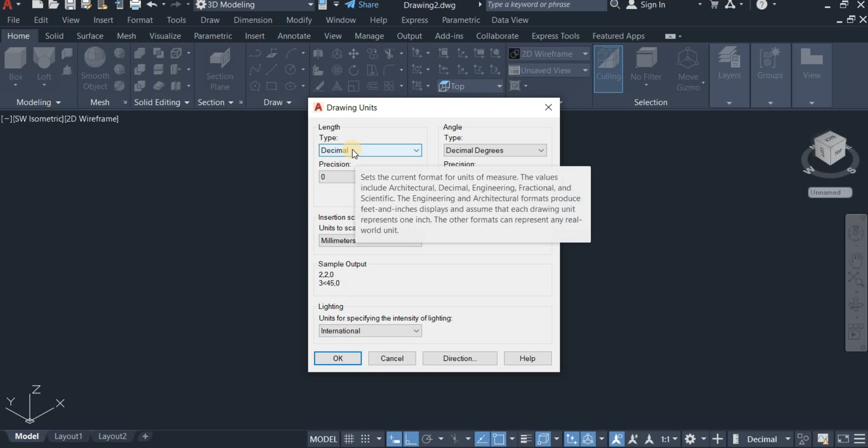Here is a new page. As usual, I will have to set up my drawing units, and that I'll do by just typing U, choose units and do my setup right here. I choose decimal as a type, then precision I'm going to choose 0, insertion scale is millimeters, and I click OK for that setup.

Again I'm going to choose my workspace, and I'm going to use 3D modeling workspace for this, and also I'm going to set the view to top view to start the drawing.

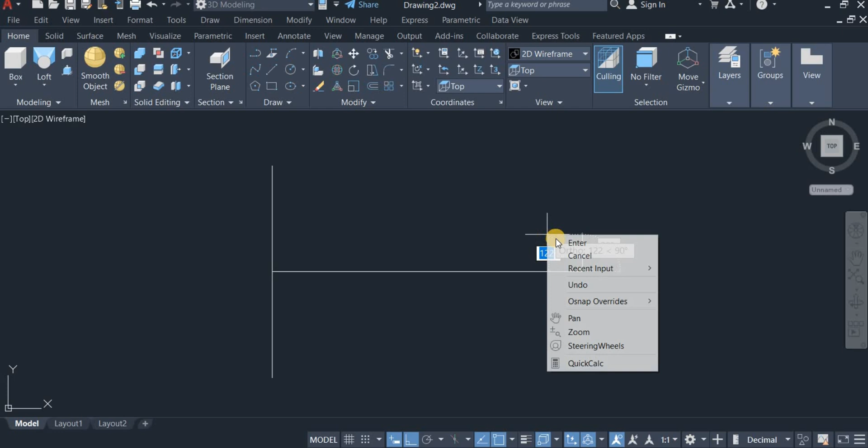First I'm going to use the line command, so I click on line and draw a vertical line of 700 units. Draw another line, a horizontal line of 1000 units. Then draw another vertical line of 500 units.

I'll move this vertical line from the midpoint here and drop it right here. Then use the line command again to connect these two vertical lines. Repeat line and connect these two.

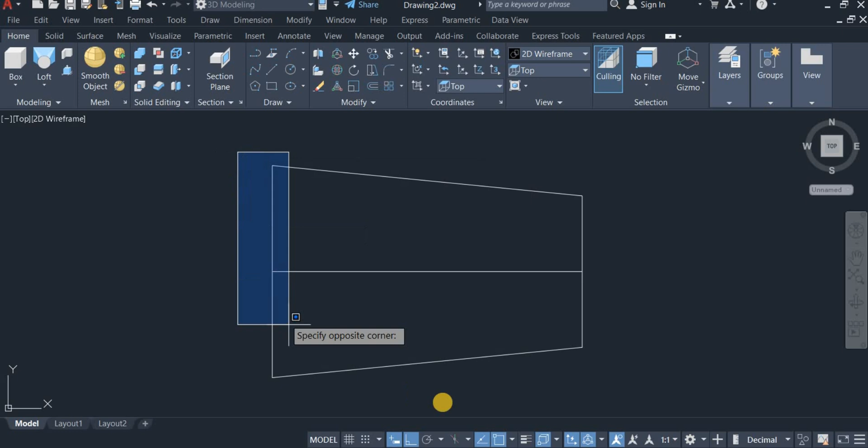Now with the join command, I'm going to join all these lines together. I click on modify and choose join and highlight all this. So I now have one polyline.

Now with the offset command, I'm going to offset this. I click on offset, right click and choose through. Click on this and pull this together. Close. It should be okay. Exit the command.

Now draw a vertical line. Cut it off from somewhere here. Then use the trim command to trim off these ones.

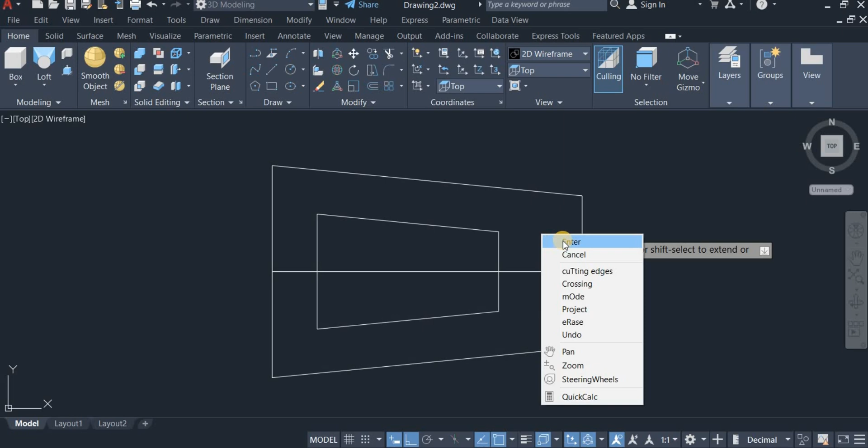Then shift this one towards the right. Move this closer here. It should be alright. Okay, so I'm now going to use the fillet command to fillet all these corners.

I click on fillet and choose the fillet radius of 100 units and fillet these corners. Repeat fillet. This time right click and choose multiple because there are more to fillet.

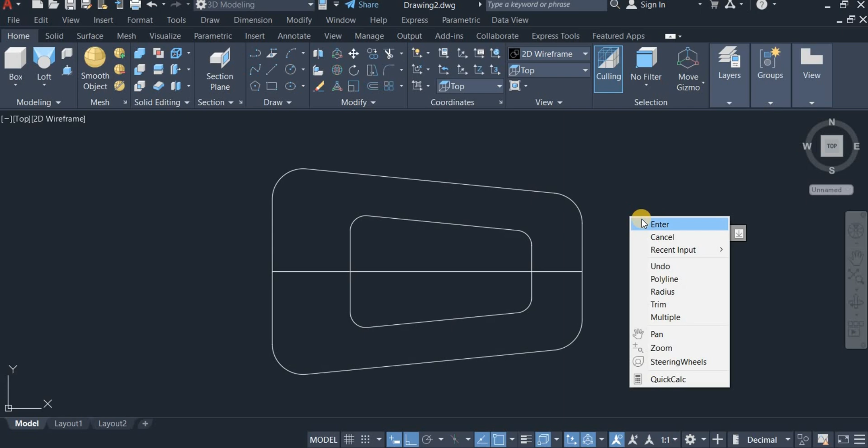Next I'm going to draw a line from these two centers, then move the line from this point to here, somewhere here.

Now draw a circle of diameter 135 from the red point. Click on circle command, here at the center, draw a circle of diameter 135.

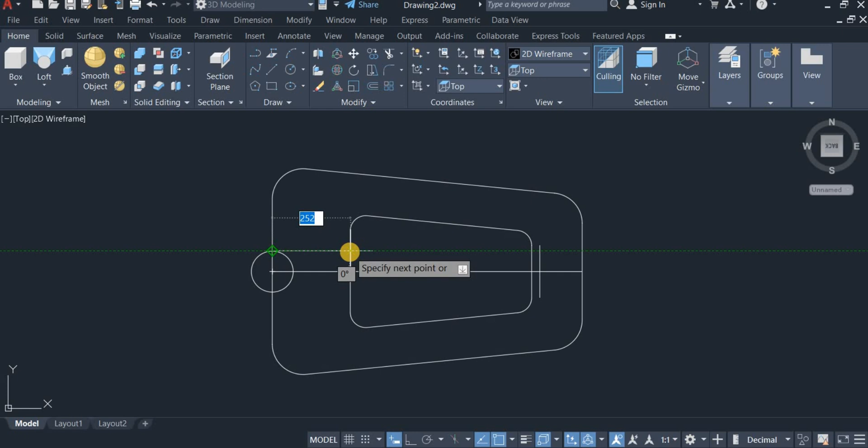Now draw a horizontal line from the red point, connect this, repeat same here. Repeat line, and from this point again to this red point, repeat line.

So next I'm going to switch to isometric view. I click on this and choose southwest isometric.

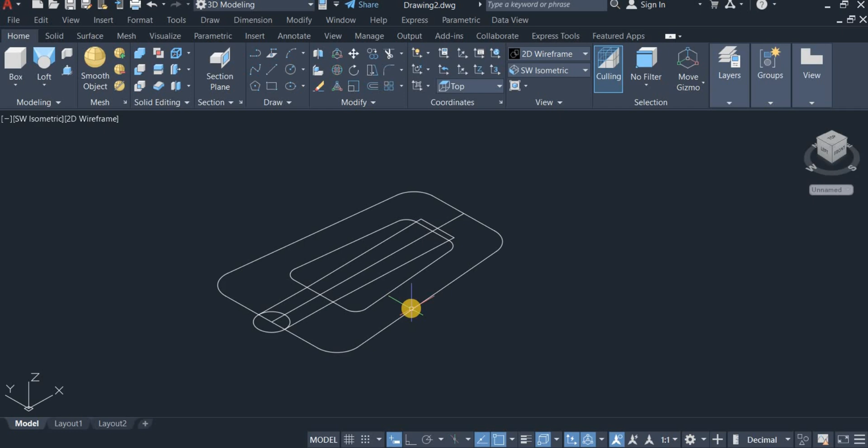I'm now going to move this very one upwards by 300 units. I click on move and move this by 300 upwards, 300.

Now with the loft command, I'm going to loft this and this. I choose loft and loft this too and enter. Enter again.

Now I'm going to switch to shade of gray to see how this looks like.

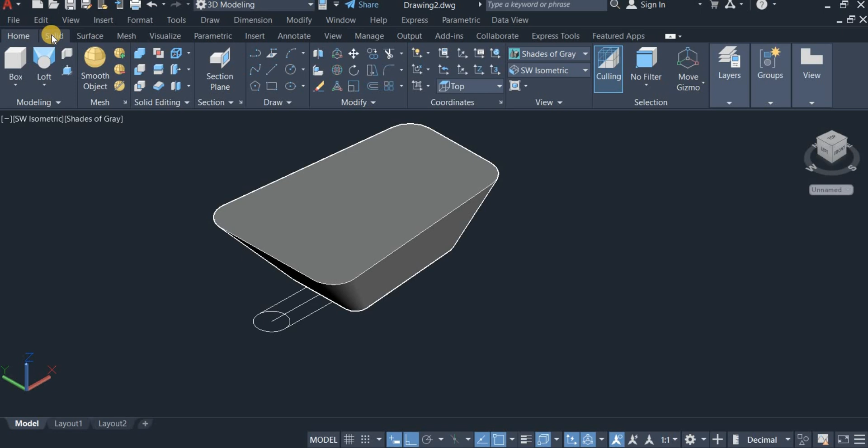Next I'm going to use the shell command to shell this very object now to a thickness of 3. I move to the solid toolbar and click on shell, click on this object, click on the top on the shell, enter, and enter a thickness of 3. That's done.

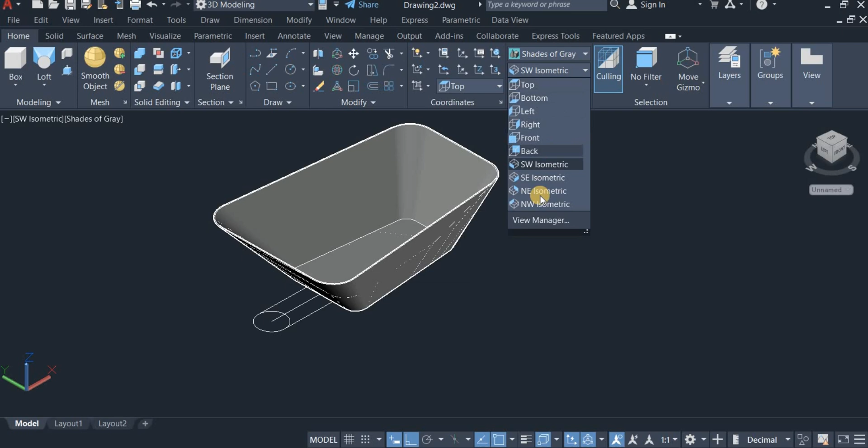So I'm now going to switch to front view again. I'm going to switch to front view.

Now I'm going to draw a rectangle, put here as the starting point. Draw a rectangle of this size. I'm going to rotate this rectangle to an angle of -8 degrees.

I click on this rectangle, right click and choose rotate. With here as the point of rotation, uncheck the ortho mode and enter -8. Now switch back again to isometric view.

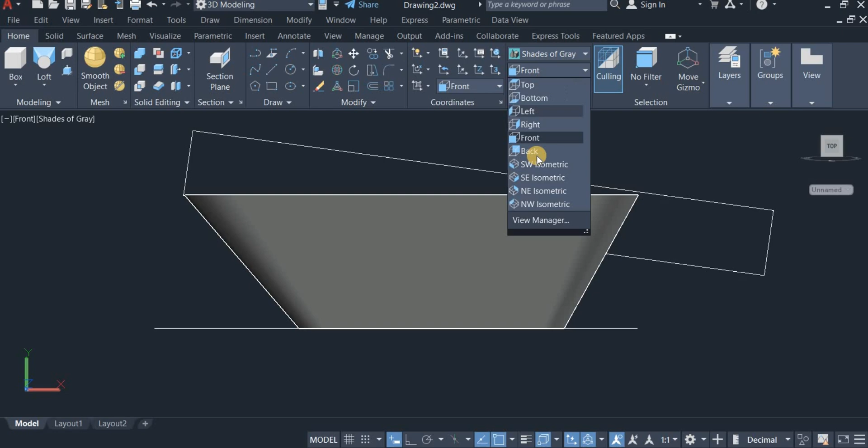Now I'm going to use the press pull command to press pull this. Switch to wireframe. Now use the solid subtract command. I'm going to subtract this from this. So I click on this first, then subtract this.

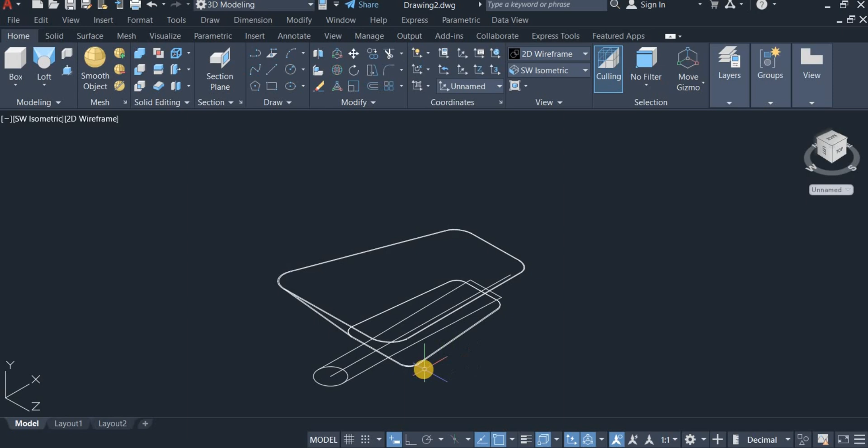So I now have to delete this. So here is the object now. So I'm now going to switch to top view.

Switch again back to wireframe. Remove this line or reduce it to 0 point. Switch to front view.

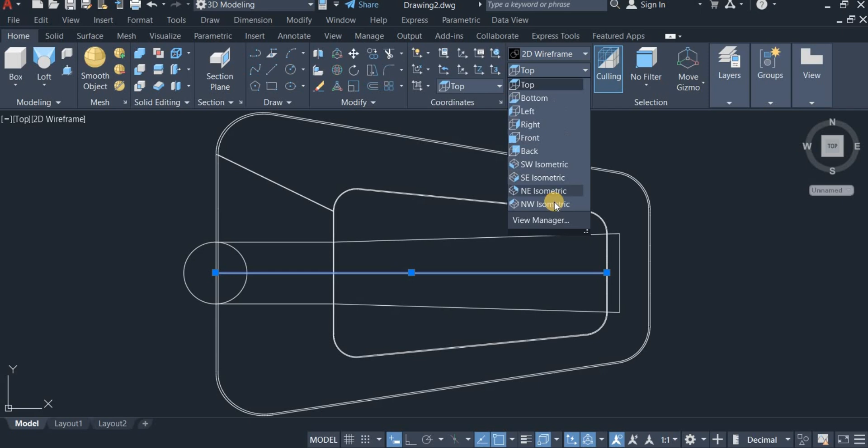Now draw a line from 0 point and connect these two. Draw another line from 0 point. Draw a line. Check the ortho mode. Draw a line of 600 units. Exit the command.

Now switch the view to isometric. I'm now going to hide this for some time. Click on this and isolate it.

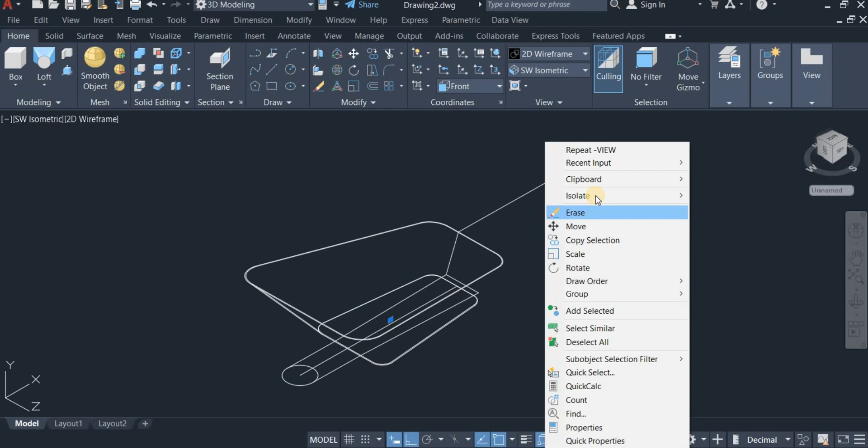I'm now going to join these two lines using the join command, and copy this line from the 0 point and place it right here.

I'm now going to switch to top view. Switch the UCS to top. This time I'm going to rotate this to an angle of 25 degrees.

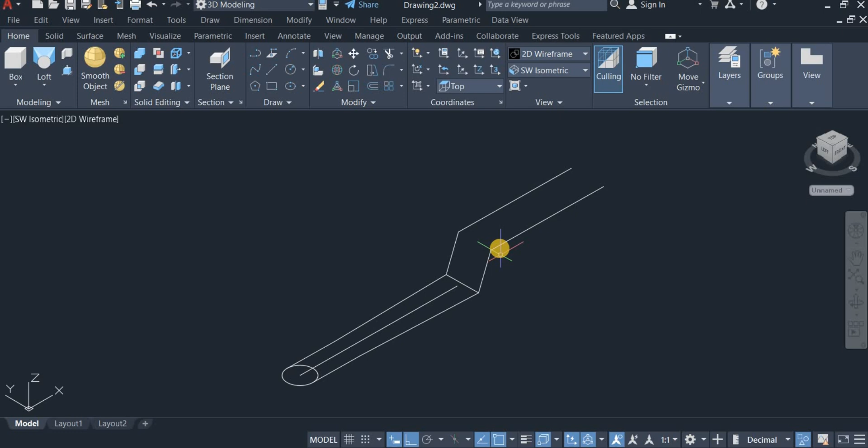Before I do that, I have to also fillet this. So I'm going to use the fillet command to fillet these edges, these two. Right click and choose a radius of 100 units, and fillet this and this. Repeat fillet, fillet this and this.

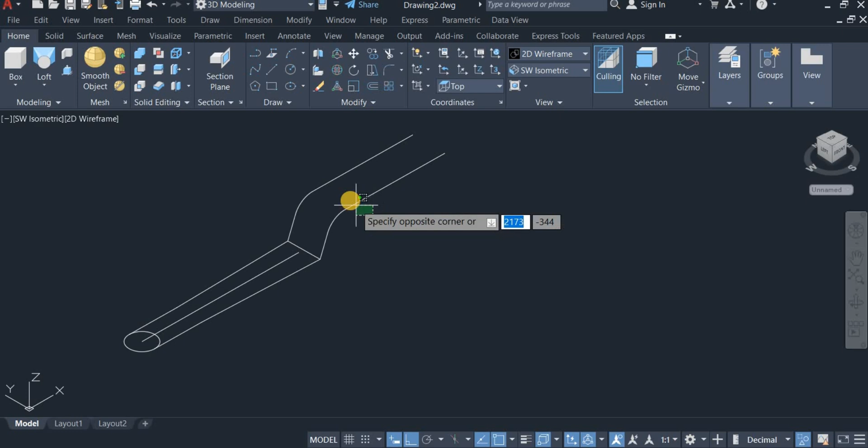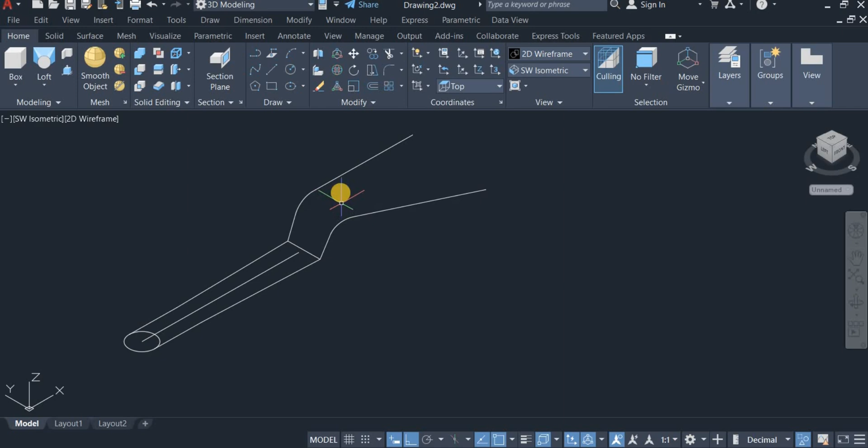Now I'm going to rotate this to an angle of 25 degrees. So I highlight this, right click and choose rotate. But here as a point of rotation, I'm going to rotate at an angle of minus 25 degrees. Click on this and also rotate to an angle of 25 degrees.

Now with the trim command, I'm going to trim off this, and this, and this.

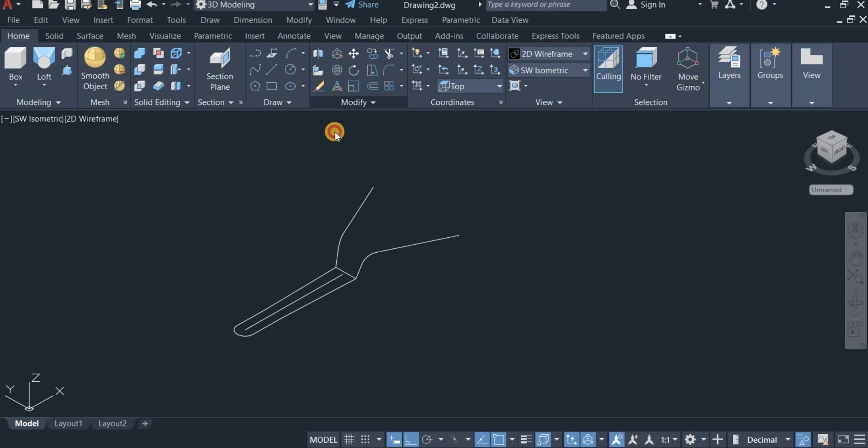Now use the join command. Join this, this, this. So I now have one geometry there.

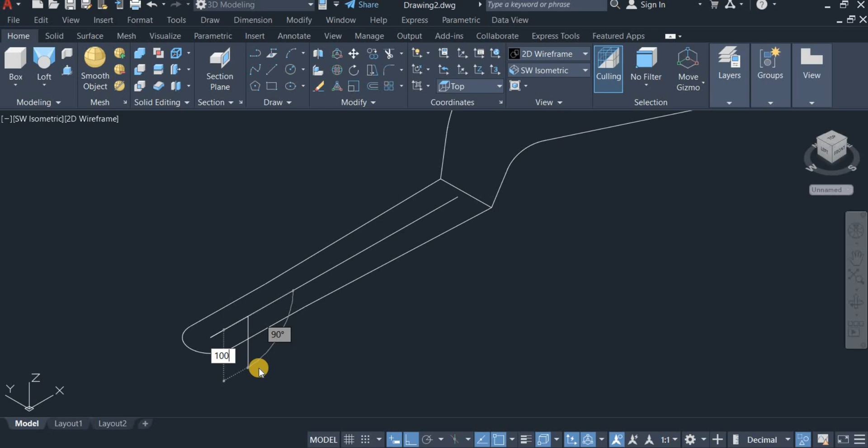Next I'm going to draw a line from this point. Draw a line of 125, which is the radius of the tire. Then draw vertically downwards by 100. Exit the command.

So I now have to draw a circle of diameter 25 units. Now I'm going to sweep this very circle on this very part. So I come right here, click and choose sweep. Highlight this very circle, enter, and click on this very part.

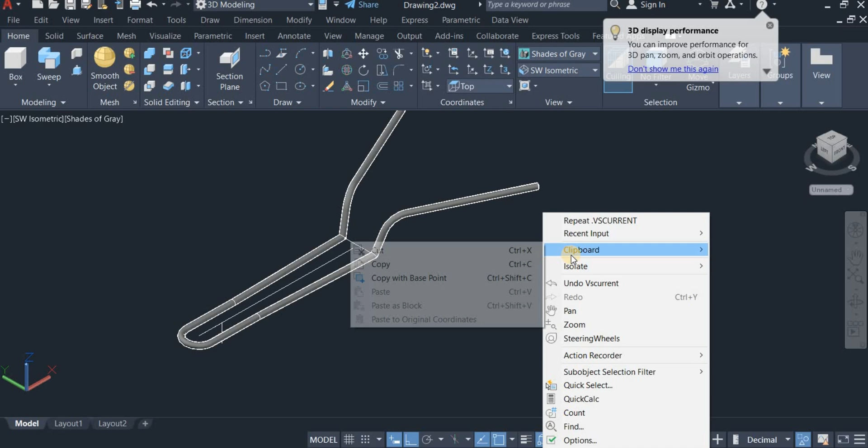Okay, so that is done. Let's view in shade of gray. Let's also end the isolation to see how this fits in.

Next I'm going to start to create the handles of this very wheelbarrow. So I'm going to turn it around. I'm going to draw a line of 3mm from the center. Draw a line of 3.

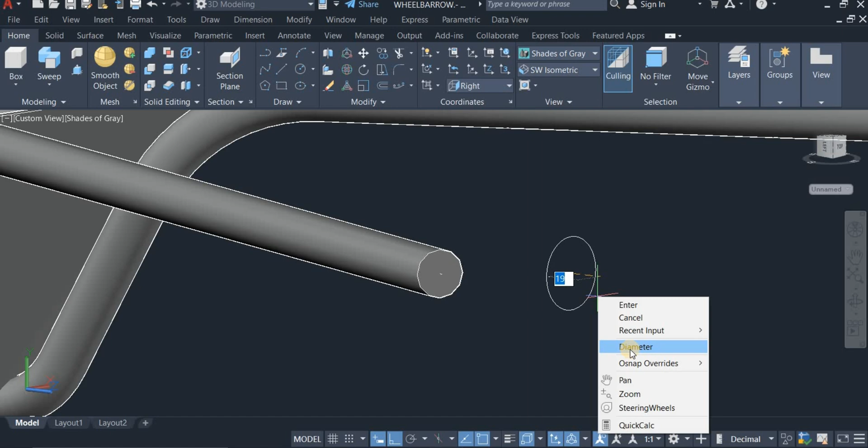Now draw a circle of 40 diameter. Now I'm going to sweep this very circle along this path of the 3mm line. So I click on sweep, click on the circle, enter, and locate this very small line.

Now I'm going to draw yet another line of 100 from this center. Now draw another circle of 30 diameter. Now draw a small square of 2 by 2.

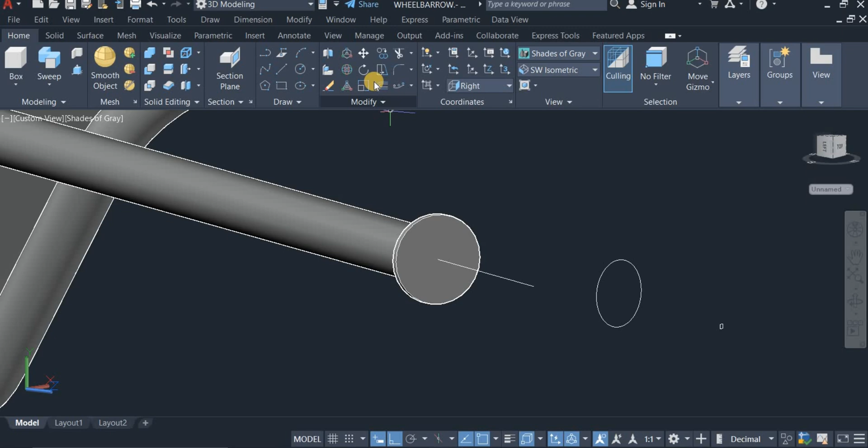So I'll move this square from the geometric center and drop it at the quadrant point of this very circle, which is here.

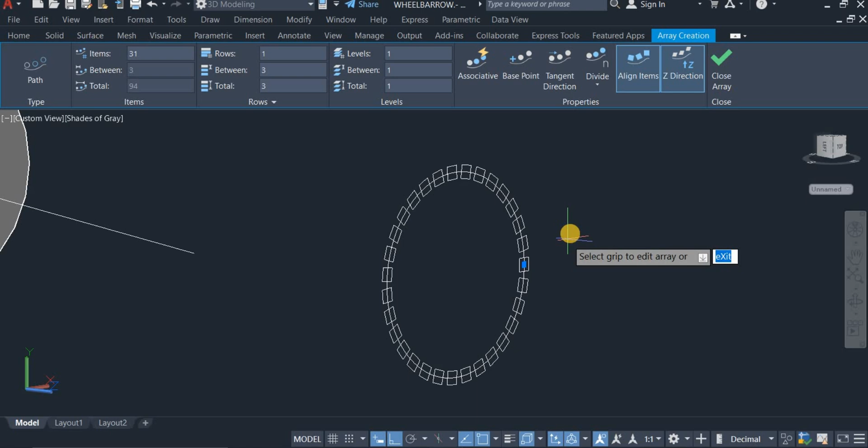Now I'm going to use a path array to array this very square along the path of this very circle. So I click on path array, array this very square, click here. Now click on base point. The base point of this square is here. Now choose the tangent direction, click on tangent direction. This is the tangent direction. Now click on measure and click on divide to close up this gap and exit this command.

Next I'm going to use the group command to group this. So highlight the whole of this, right click and choose group. Now I'm going to sweep this along this very path, the path of this very line. So I click on sweep, click on this, enter, and click on this very line. So that's the first handle.

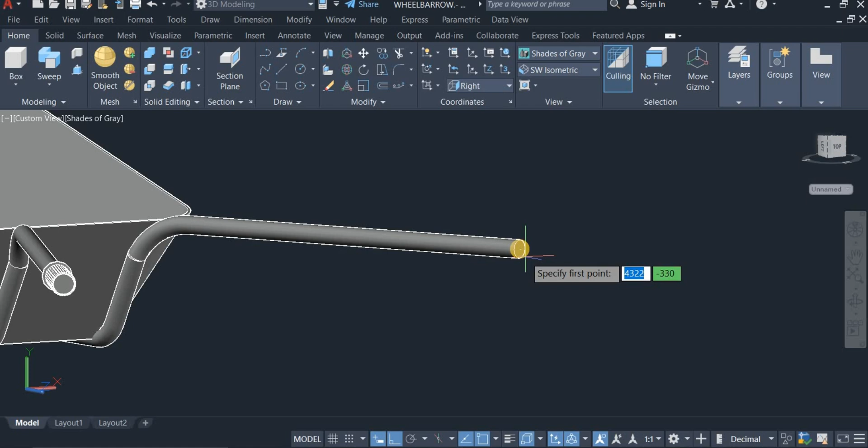I'm going to turn it around again and draw the second handle. I'm going to draw another line of 3mm from the center. Enter. Now draw another circle of 40 diameter.

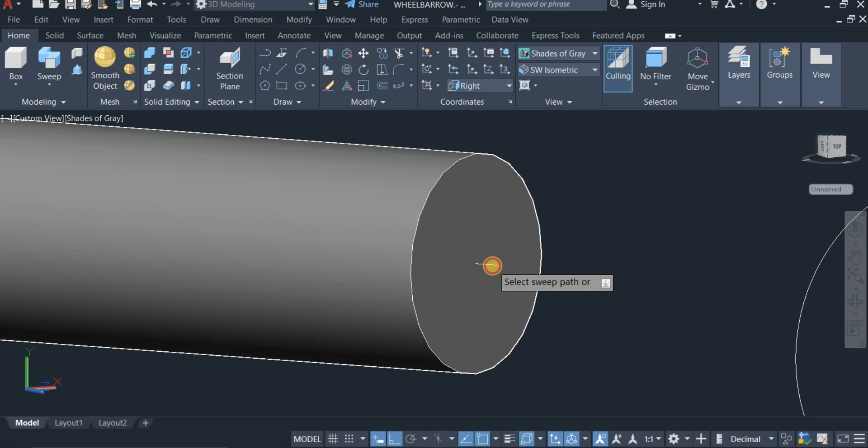So I'm going to sweep this very circle along this very path. I click on sweep, click on this circle, enter, and click on this 3mm line. Now click on line command again and locate the center, and draw another line of 100mm.

Now draw another circle again of 30 diameter. Click on circle and draw a circle of diameter 30. Again, draw a square of 2 by 2, and enter.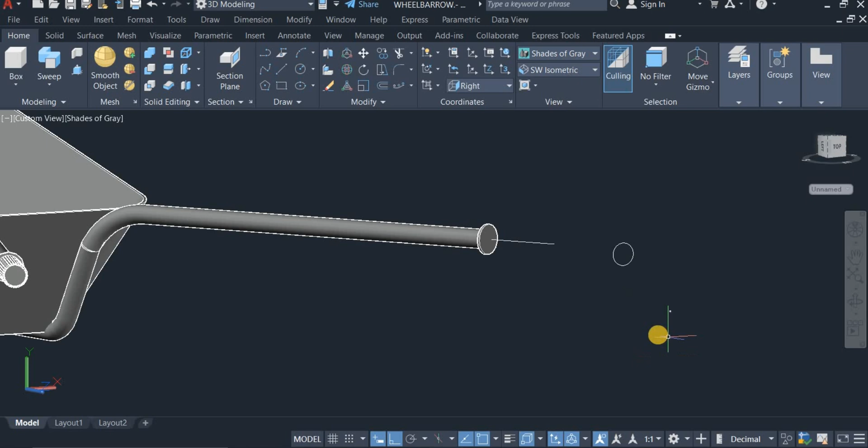Now move this square. Click on the move command. Move this square from the geometric center and drop it at the quadrant point of this very circle.

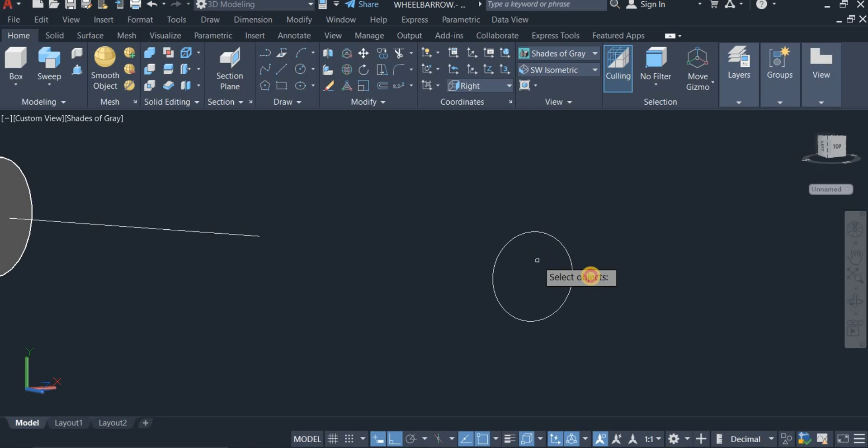I'm now going to use the path array to array this square along the path of this circle. So I click on path array, highlight this square, and click on this. Select the base point. Here is the base point. Then tangent direction, this is the tangent direction. Then click on measure and click on divide, and exit this command.

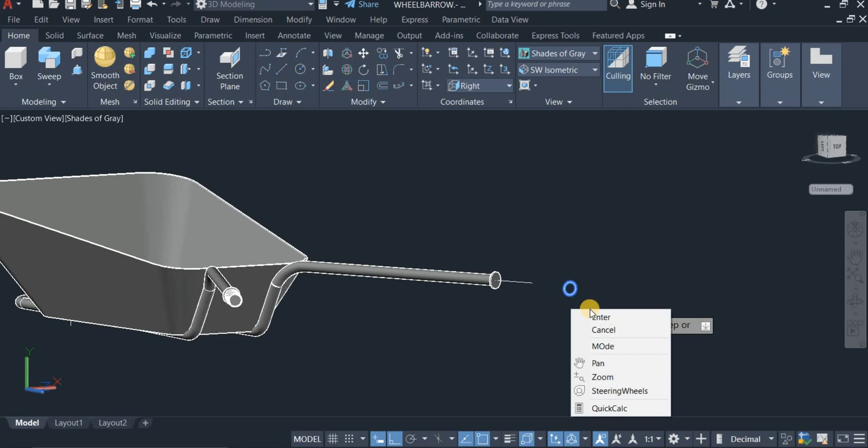Again, I'm going to group this, highlight the whole of this, right click and choose group. Now I'm going to sweep this again along this very path. So I click on the sweep command, click on this, enter, and click on this very line. So that's the second handle.

Okay, so I have now created the two handles. Next, I'm going to create the support for the wheelbarrow. So in this case, I'm going to move and choose front view. Okay, so this is the front view. I now have to create the support for this very wheelbarrow.

So I'm going to draw a line of 240 and angulate it. Draw a line of 240 downwards. I have to uncheck the ortho mode. This angle should be okay. 240, 240. Now draw a horizontal line of 80. Okay, now draw again another angulated line of 240, 240.

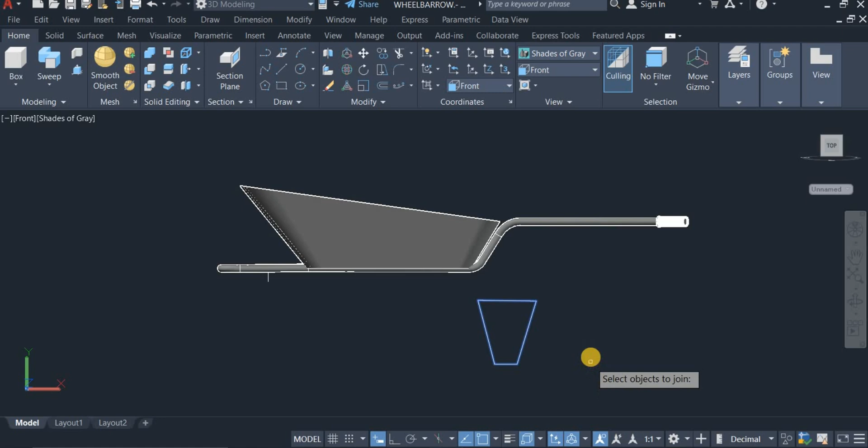Okay, so I'm now going to close up this, click and close this up. Okay, so I'm going to use the join command to join all the lines, right? Okay, now with the offset command, I'm going to offset this very geometry now to a distance of 6 inwards. So I click on offset and enter 6 and offset this.

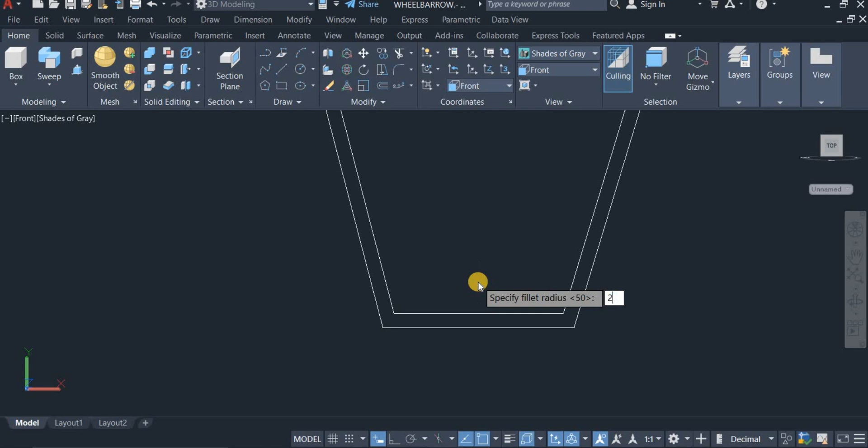So I'm going to fillet these two angles. So I click on this, fillet, choose radius of fillet, make it 20, and fillet this and this, repeat fillet this and this, repeat fillet this and this, repeat fillet this and this. Okay, exit this command.

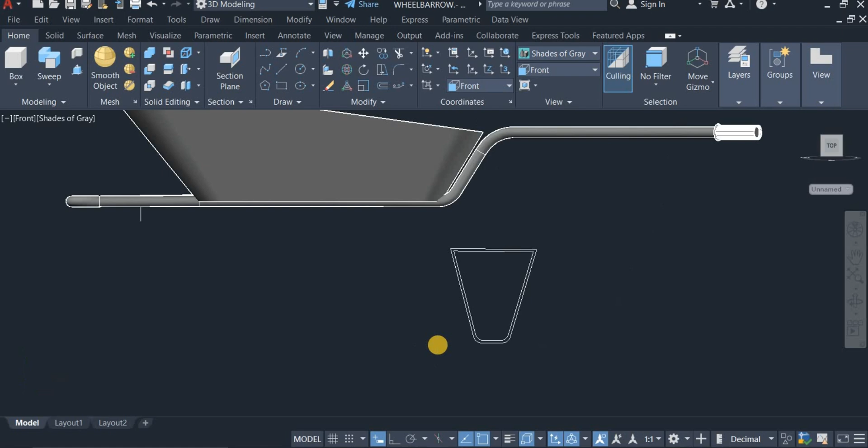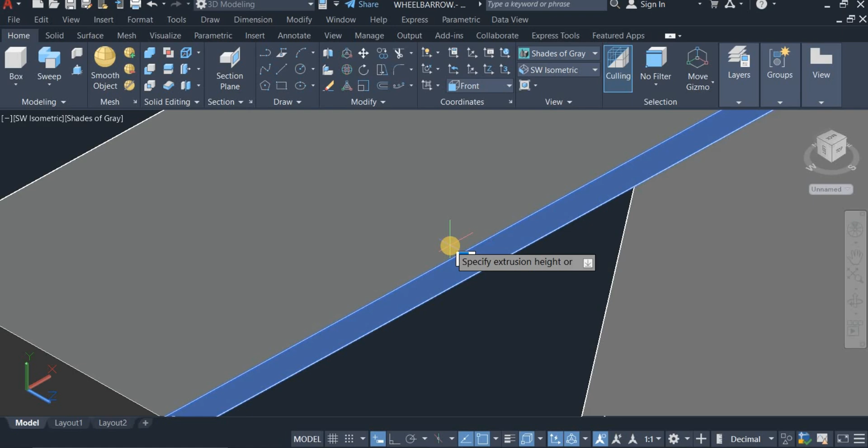Okay, I'm going to switch to isometric view now. So I'm going to now use the press pull command to pull this to a distance of 20. Okay, this is one of the legs. Now you move it closer right here. Move it here. Okay, so I'm going to hide this tray and continue the drawing.

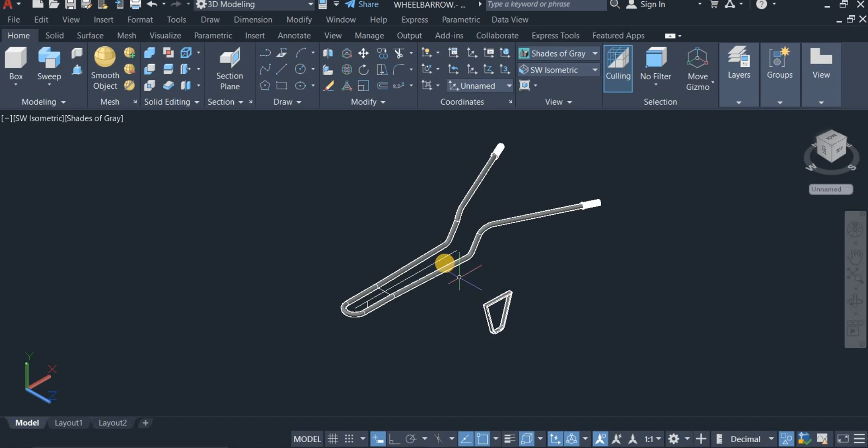So I'm going to click on this, right click and choose isolate object. Okay, so I've taken this away now. Now how to position the support. Also how to use the 2D wireframe so I can see the construction line clearly. Right, so I'm going to move this and put it right here.

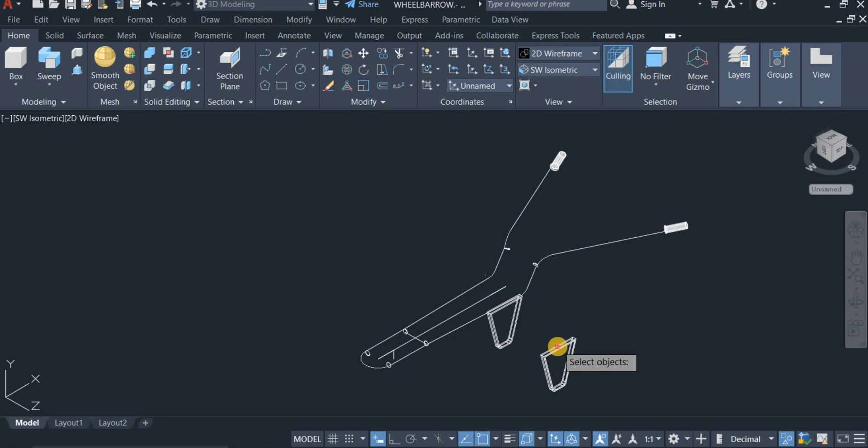I'm going to copy this and pick it from this very point. Then drop it right here. Drop it right here. Okay. Copy this one as well. You can copy. Pick from this very point and drop it right here too. Okay, so that is done.

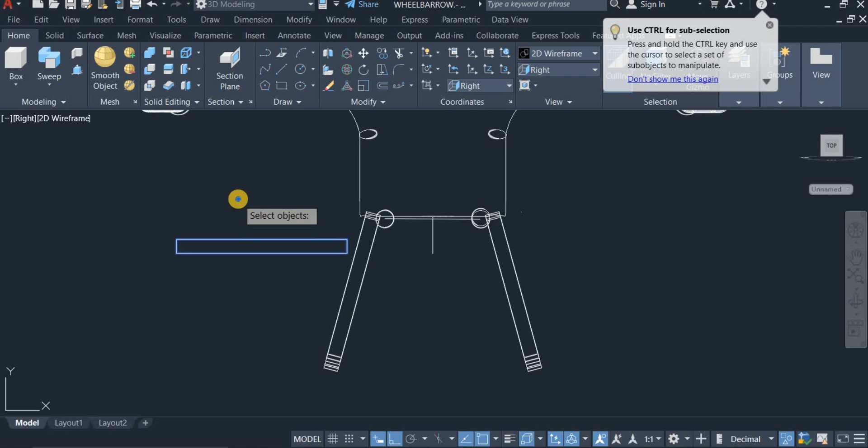Now I'm going to switch the view to right. Okay. So to be able to do the bracket, so I'm going to draw a rectangle here of 240 by 20 and enter. Now move this rectangle from this very point and drop it right here.

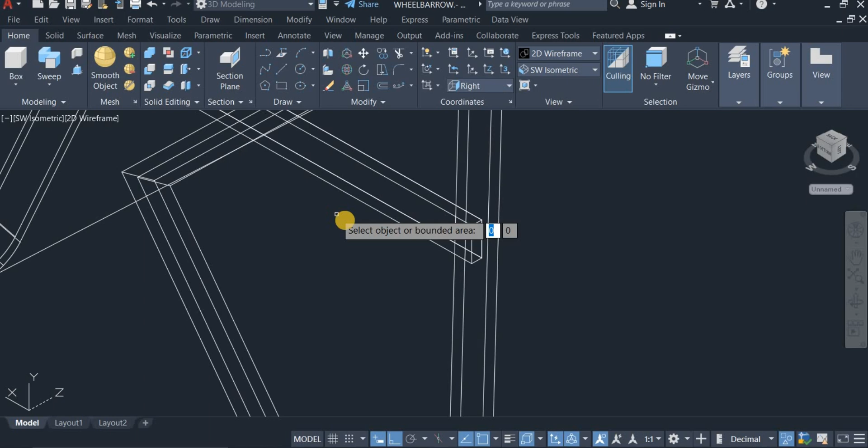Okay. Now switch again to now press pull this to a thickness of 6. Thickness of 6. Enter. Okay. Now switch this UCS to top position and now draw a line from this very point.

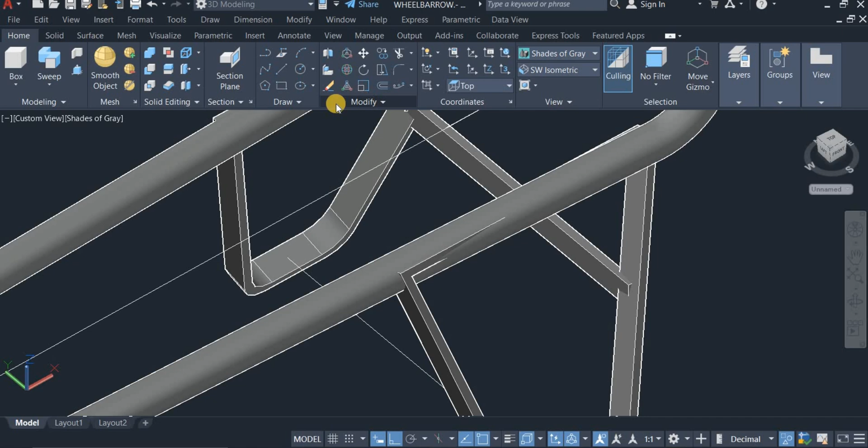Okay, so I'm now going to mirror this very bracket to the other side. So click and choose mirror. Click on this. Click on this. Choose mirror. Click on this. Then locate this center as, locate this midpoint and enter. Okay, so this is done.

Okay, so next I'm going to start to create a tire. Okay, so the diameter of the tire is 250 millimeters and the width of the tire is 70. So I'm going to draw a circle of 70 diameter. I thought I have to switch the UCS to left. Okay, draw a circle of diameter 70.

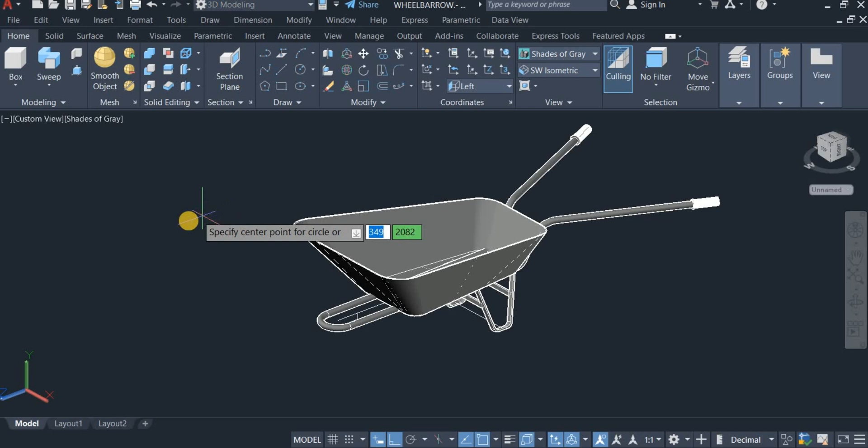Okay. Now draw a line from this quadrant point. Draw a line of 125, which is the radius of this tire. 125 and enter. Okay, so again I'm going to draw a line of 160, enter. Then move this line from the midpoint here and drop it right here.

Okay, so this is the center of the tire. I'm going to shift this very line upward by 12.5. I can use offset command to do that. Offset by 12.5. Enter. Offset it by 12.5. Okay.

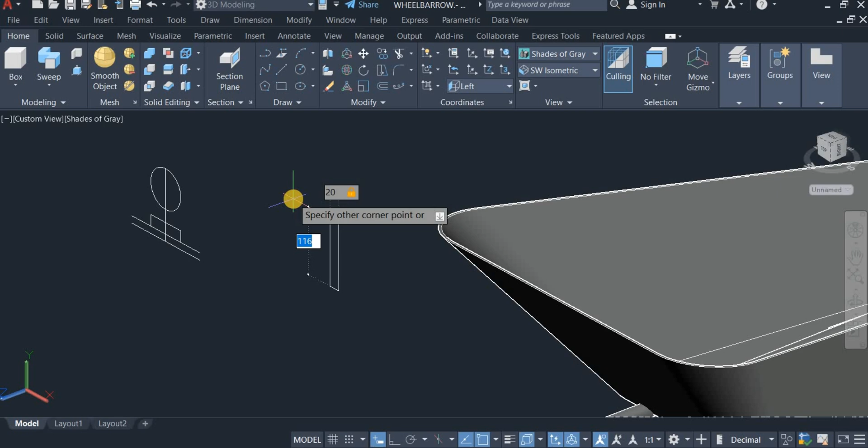Now I'm going to draw a rectangle of 70 by 20. Now move this rectangle from this very point and drop it right here. Okay, so draw another rectangle of 20 by 50, 20. Now move this one as well from this point and drop it right here. Drop it here.

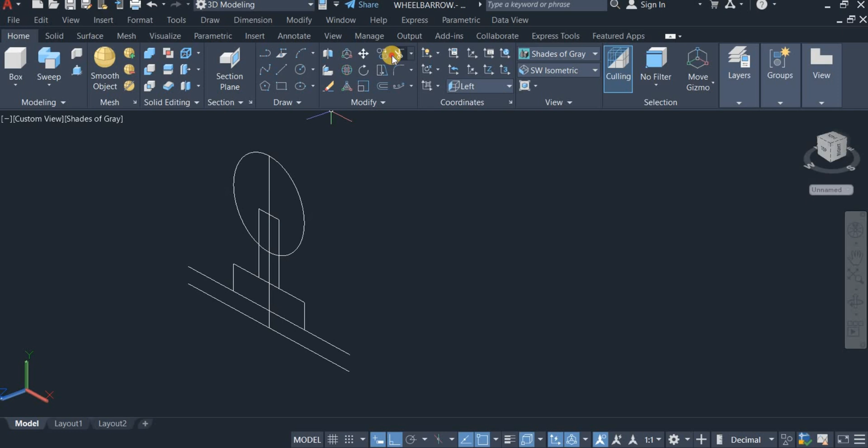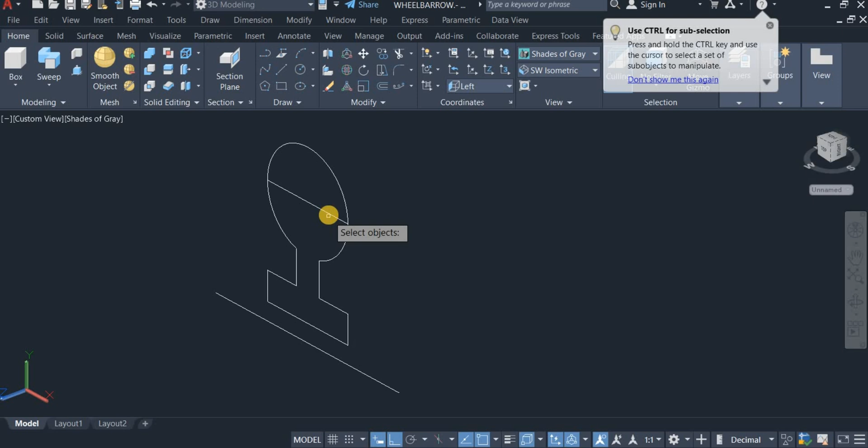Okay. Now use the trim command. I'm going to trim out this. Open up here too. Okay. Now draw a line from this quadrant point to join this. Okay. Now move this line up again by, just move it up from the right point. Okay, this side should be alright. Okay. Now with the trim command, trim off this and this, trim it off.

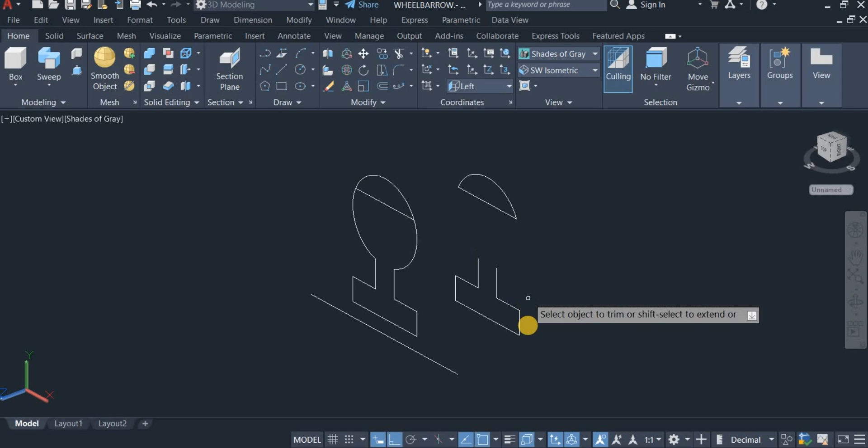Then make a copy of this. Click on copy. Copy this to copy this out. Copy right here. Then trim off these portions. Trim off these portions. Trim off these portions. Erase. Also trim off this. Now join this all up.

The join command. Click on join and join all this. Okay. Now offset this. Offset this by 3 mm. Click on offset. Enter 3 and offset this by 3. Enter.

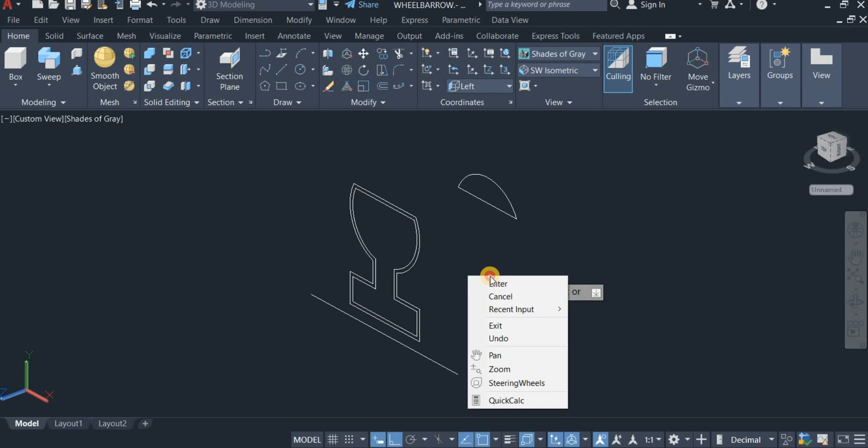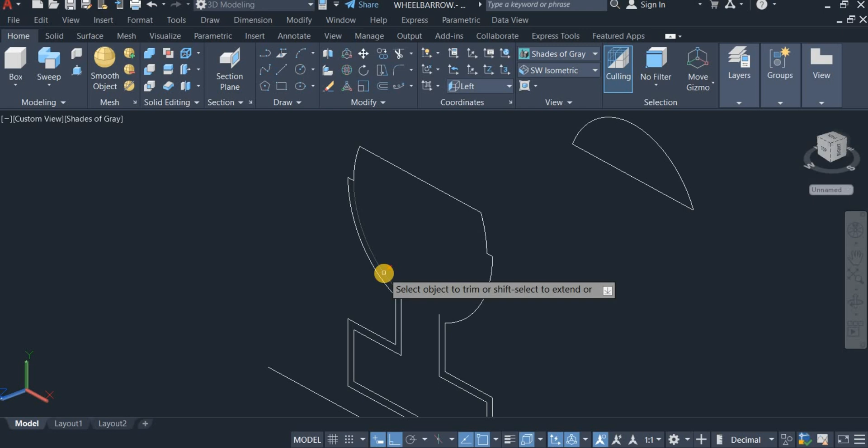Draw a line from here. Enter. Trim off these portions again. Just trim off this. And this. Okay. Join this all up. Join.

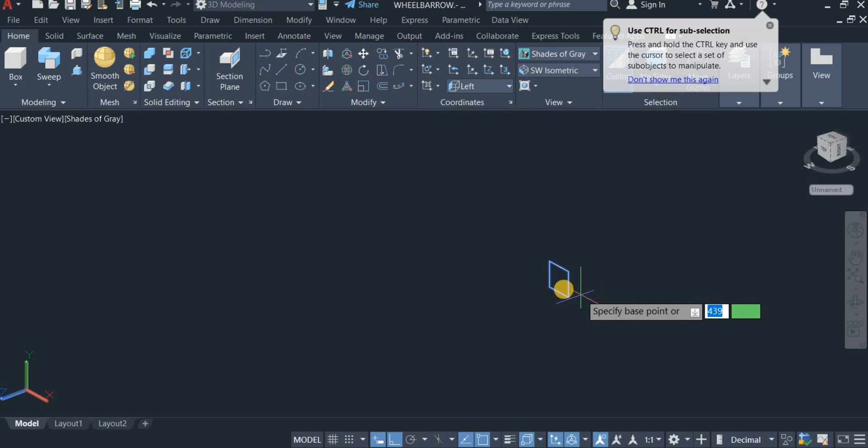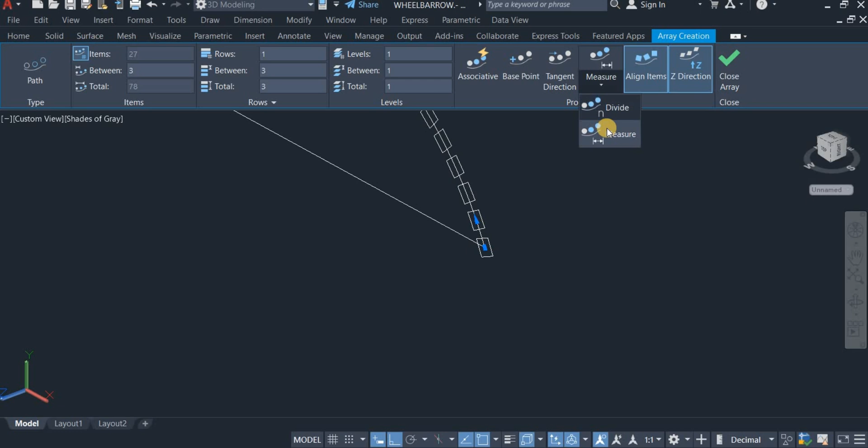Okay, now draw a square of 2 by 2. Then move this square from the geometric center and drop it right here. Okay, now with the path array, I'm going to array this very square along this very arc. So I right click here and choose path array. Highlight this square and click on this. Okay, choose the base point. Base point is right here. Okay, now click on tangent direction. This is tangent direction. Okay, now click on measure and click on divide and exit this command.

Right, so I'm going to use the group command to group all these. Right click and choose group. Group.

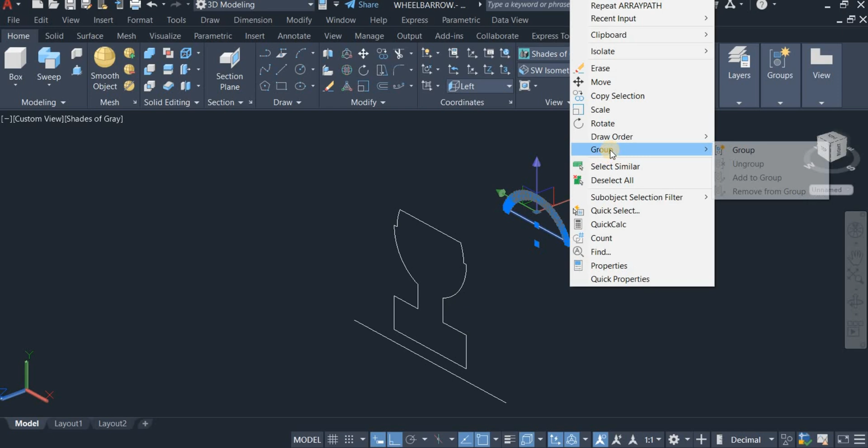Okay, now I'm going to move this from this very point and drop it right here.

Now I'm going to use the revolve command to revolve this. I come right here, click on revolve, enter. Now with these two ends as the axis, enter 360 degrees.

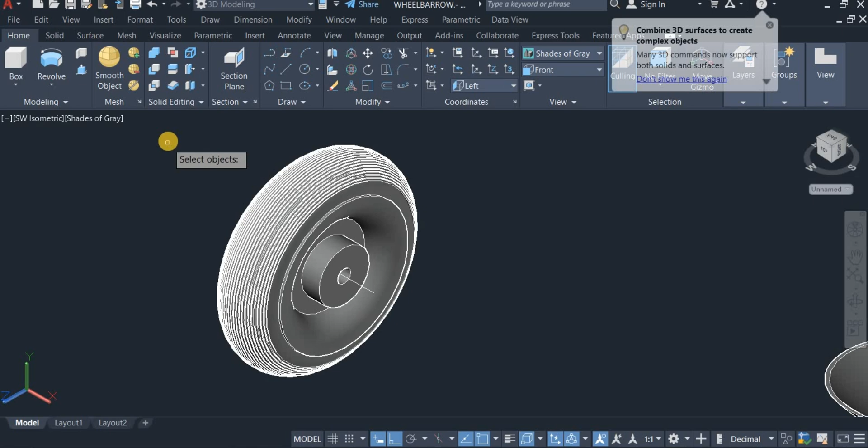So with the union command, I'm going to unite all this.

Now I'm going to switch the UCS to front. Click right here and choose front. Now draw a square of 50 by 50.

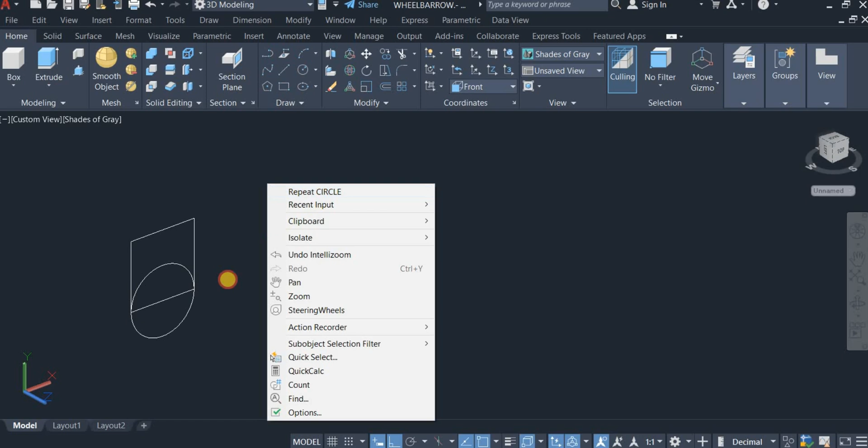Now draw a circle with here at the center. Now draw yet another circle, repeat circle, draw another circle of diameter 25.

Use the trim command, trim off this, and this. Now use the press pull command to press pull this to a distance of 20.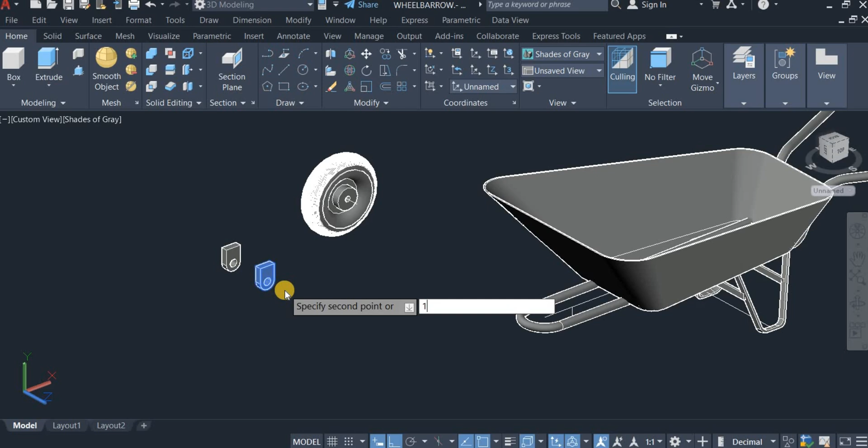Now copy this and shift distance of 135, and enter. Exit the command.

Now draw a line of 160, 160. And draw a circle of 25.

Now sweep this circle along the path of this very line. Enter, then click on this line.

Alright, I'm going to draw a line from this very point to this point.

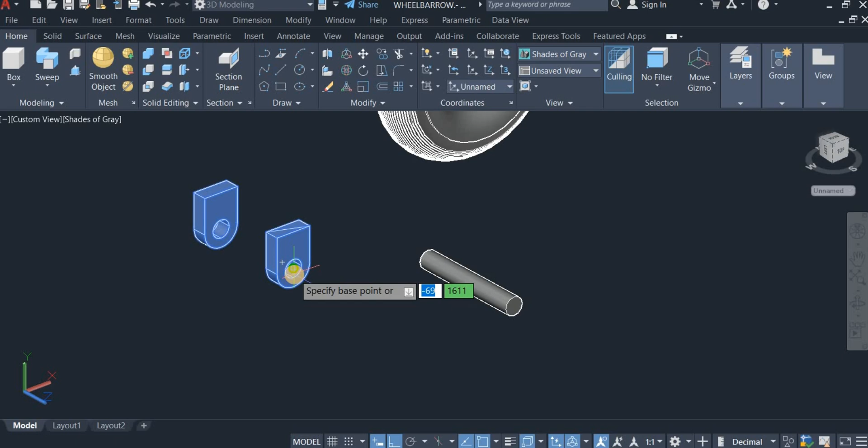Now move these two from the center, from this center, and drop it right here.

So I'm going to hide this tire. Highlight this, right click and choose isolate, and click on hide object.

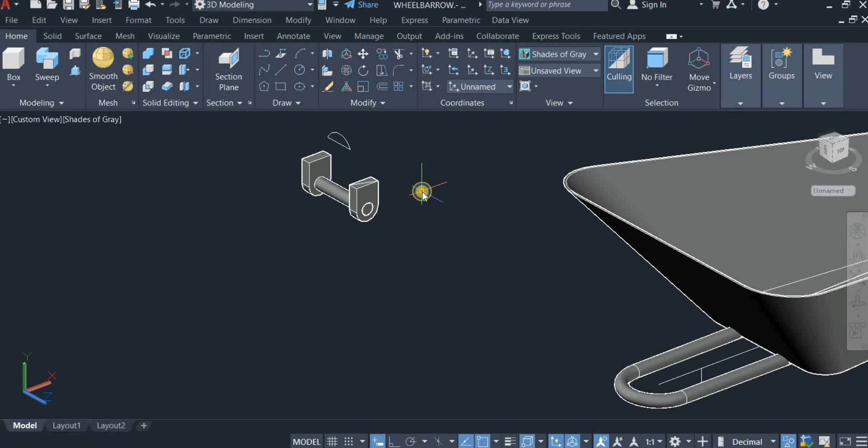Now move the whole of this from this point and drop it right here. Now end isolation. Right click and click on end isolation.

Now I'm going to draw a line of 135. Check the ortho mode. 135 and enter.

Then move this line from the midpoint and drop it right here.

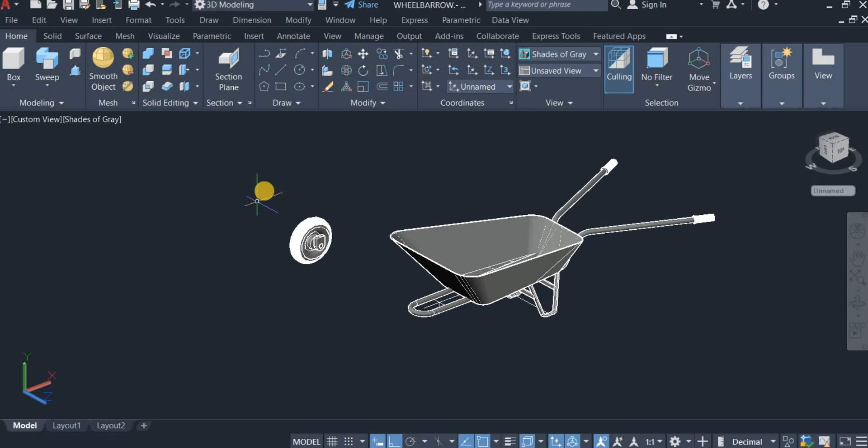Then use the union command to unite this. Click on union and click on this, highlight the whole of it.

Now move the whole of this and pick it from here. Pick from this point and locate the other point.

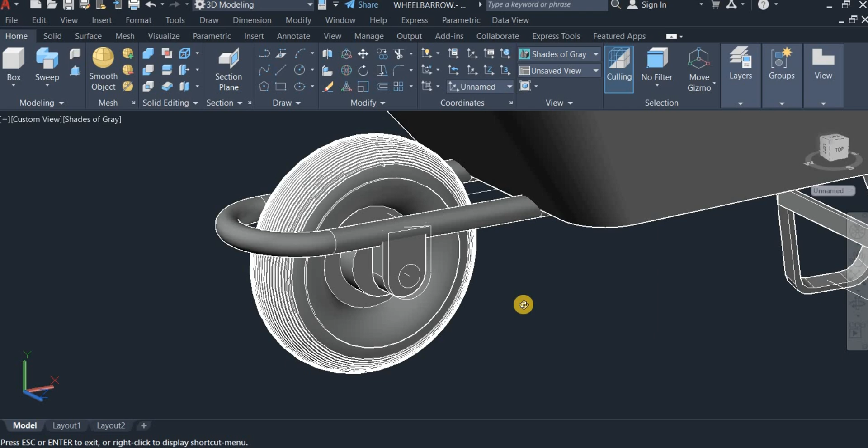So the next thing I'm going to do is create the brackets for the tire, this and this. So I'm going to switch to front view.

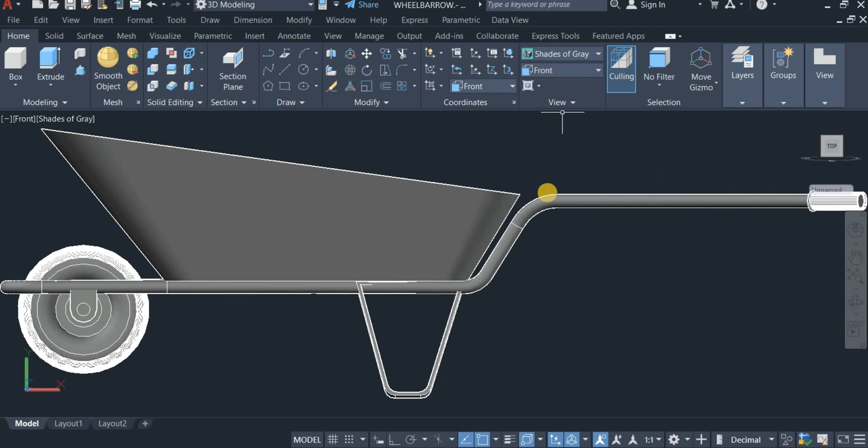Switch to front view. Also switch again to 2D wireframe. I'm going to use the polyline command.

Draw a line from this very point. Angulate this line.

Now draw another line again from this point. Enter a distance of 20.

Now copy these two lines out. Move them here. And draw another line from this very point, line of 20.

Now group all these lines together. Use the join command to do that.

So I'm going to offset these lines now by 6. I'll click on offset and enter 6 and offset this.

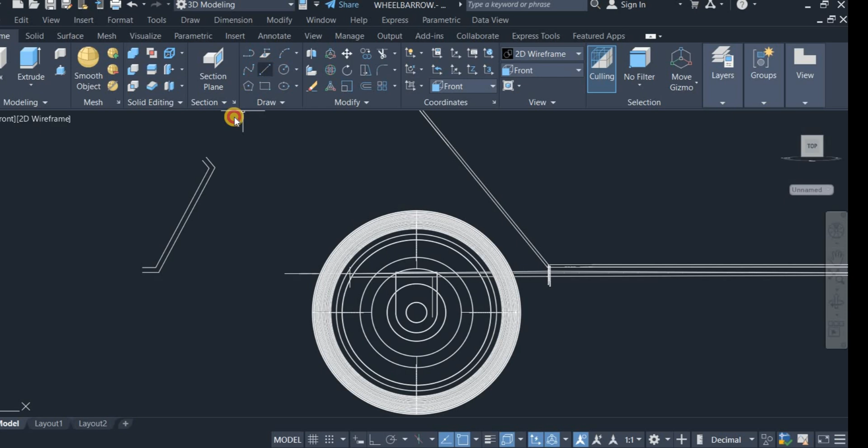Now close up the ends of these lines. Click on line and close up this end. Enter, repeat line and close up this end.

Now use the join command to join them all up.

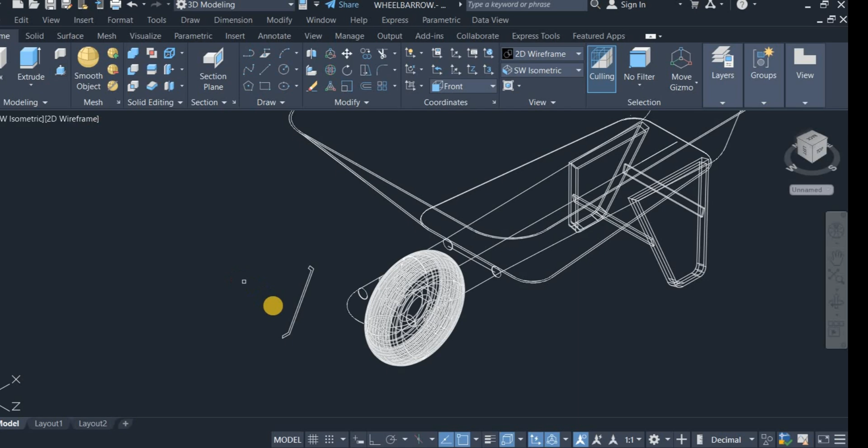Now switch back again to isometric view. I'm going to press pull this now to a distance of 15. I click on press pull command, click on this, enter 15.

Now I'm going to move this from this very point. Locate this center, look at the center of this very bracket here. Let's locate this first.

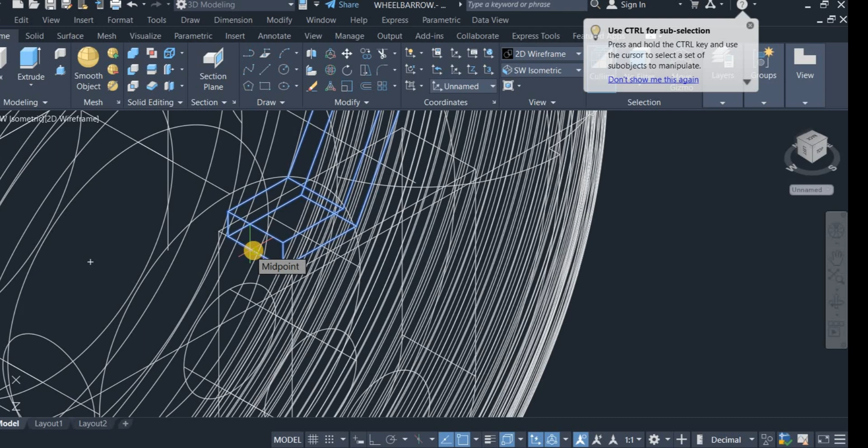Okay, so I can move it back to this center, that's the geometric center of that. Drop it there. Let's view the shaded view and see how it looks like.

I have to do some adjustments right here. So I click on front view again. I'm going to adjust something right here. Clean up this. Clean up this. Now click, switch to wireframe.

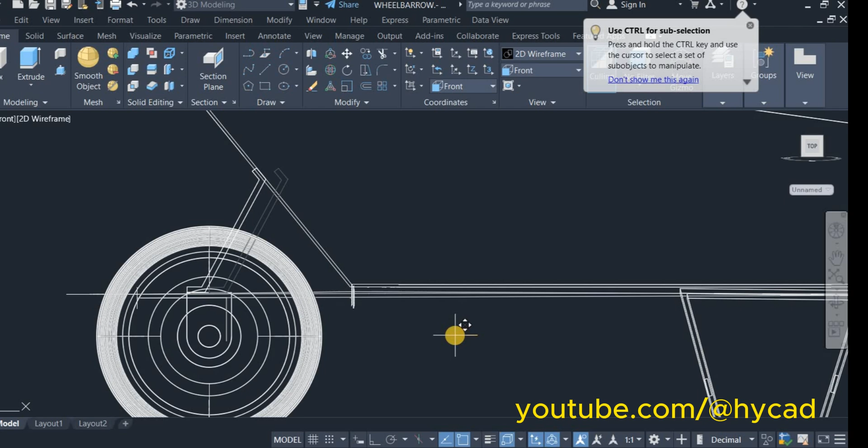So I'm going to adjust this a little. Click on this. Move, click right here and shift. That should be alright. So switch back again to isometric.

This is it. So what I'm going to do now, I'm going to hide the tire. Right click, choose isolate, and isolate the tire.

So I'm now going to use the mirror command to mirror this to the other side. Before I do that, I have to switch the UCS to top. So I come right here and click on top.

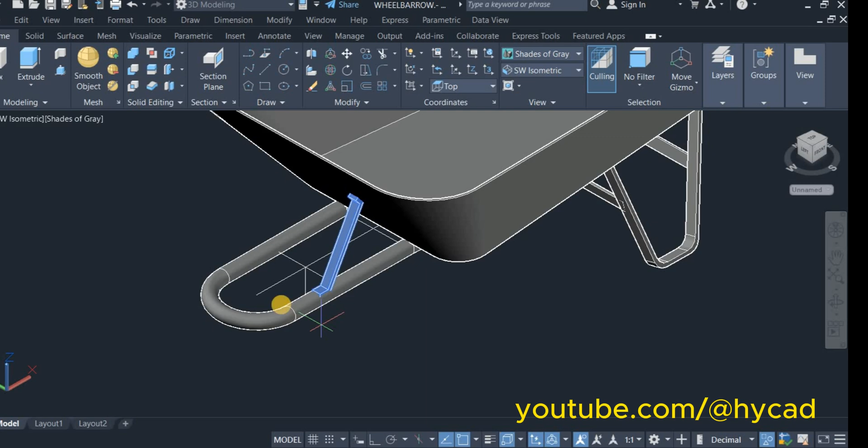Now I'm going to mirror this to the other side. So I click on this, click on mirror, choose mirror, click on this, with here at the center. That has been done.

So I have to bring back the tire again. So I right click, and object isolation. I'm going to switch off some of the construction lines here.